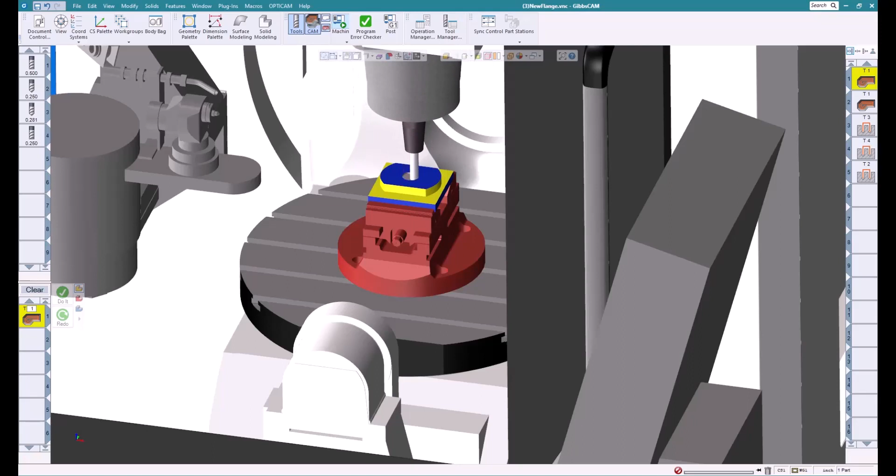Today we're going to be talking about utility markers. Utility markers are the ability to put explicit commands live in the toolpath as you program your part. If you wanted to maybe change a spindle speed or add a comment along the way in your toolpath, utility markers is the way to go. They're fast, they're easy to use, it's drag and drop kind of stuff, and easily editable.

Here is our finished toolpath. So we're going to go up here to our operation, and here we have utility markers. And when we click that on, you see that we get these points. These are the vector points or node points, whatever you want to call them. And different choices that we can do.

We can change the feed rate. We can change the spindle speed. We can put a comment. We can change the CRC. We can put in a program stop. All these things that you might need when you're programming your part. So for example, let's do a variable feed. Why would we do that?

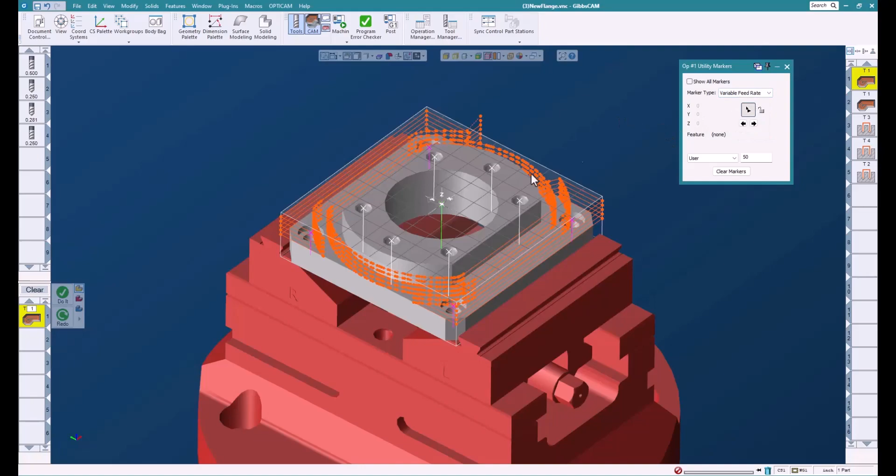Well, let's say that we want to come into this corner here at a higher rate of feed and then slow down. Okay, so maybe we want to come in at 50. Let's come in at a higher rate. Let's come in at 100, and we can drag it right there. Now let's say that when it ends, we want it to be 25. So it's going to start here. By the time it gets to here, it's going to change the feed rate. So it's going to slow down around this corner.

Now, we could also have it be both the same if we wanted to do that. But there's a good reason. Maybe the tool backs up. Maybe there's chip conditions. Maybe it's hard material. All those sorts of things could be possible. Maybe you want to change the spindle speed as well. So let's slow the spindle down. We're going to drop this in front of our other marker. Okay, so as it comes around here, the spindle speed slows down.

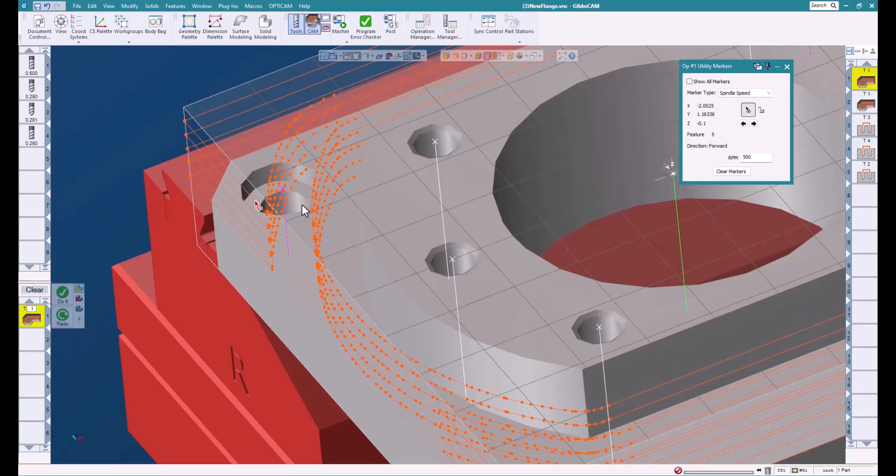We move into the corner, and we can slide this down here closer. And you'll also notice that these numbers update as well. So it kind of tells you where you're at along the toolpath, which is kind of cool. And then let's say maybe we want to put in a comment. Let's put it in as slow down the tool. And then we can drop that here if we wanted to do that as well. So just a couple of quick changes there.

And again, you could put these anywhere along any part of this toolpath. For this presentation, I just put them in the first run of the toolpath. This way you can see it easier. But you can put them everywhere. You can put them all down in here, put them over here. It's whatever you want to do. It's very nice. It's very efficient. And it's pretty fast to do, as you can see, just kind of like a drag and drop.

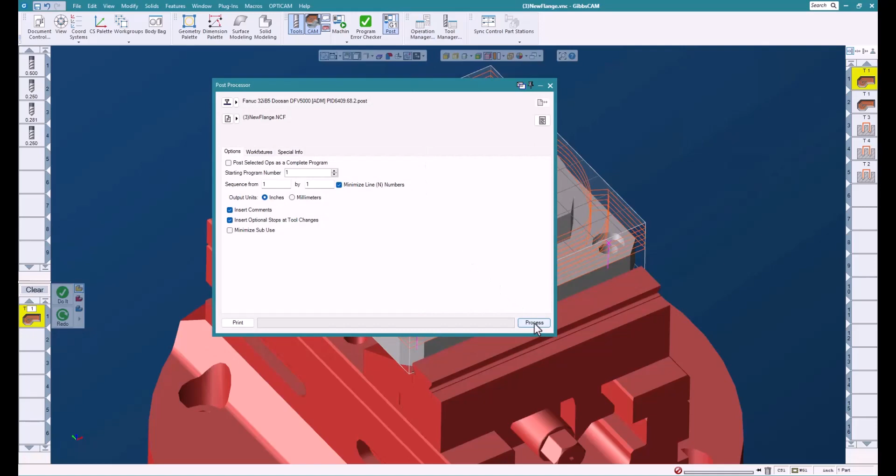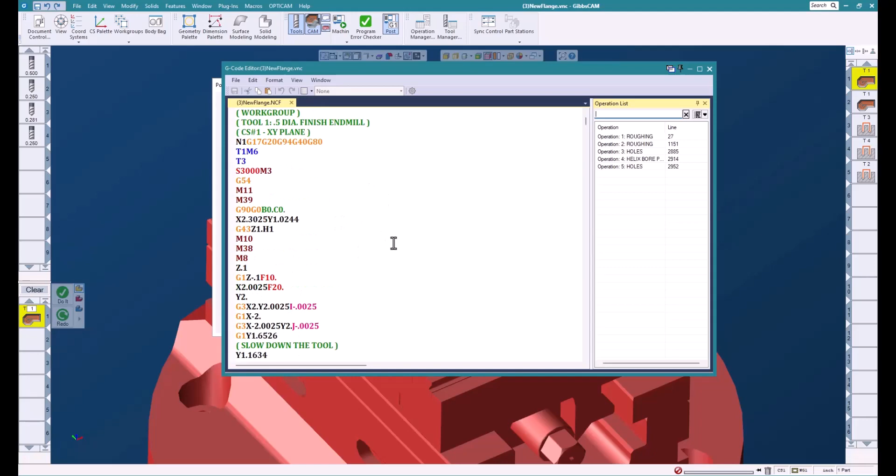Once we have the utility markers where we want them, we process it. So we're going to come down in here. We'll look at our code, our initial start, slow down the tool. We change the spindle speed. We up the feed rate, and then we slow it back down again. So these are very cool, very explicit commands that you can put into the G code without having to do a whole lot of work. Basically, it's just a drag and drop.

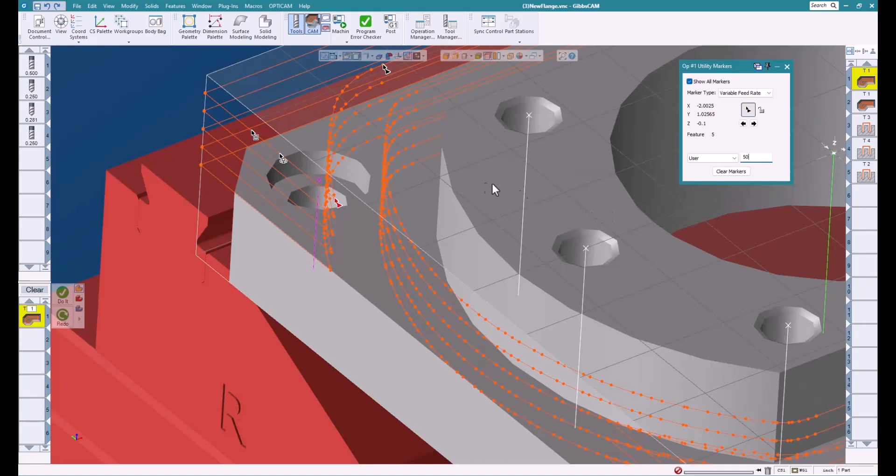You can also go back now. Let's go back to this, and let's show all the markers. So here's all the markers that we put on. And you can rearrange them. So for example, we could move this over here. We could pick on this here, and we could change this to say what we really wanted there was 50. So we can update and edit these on the fly. We can edit anything we want to edit. Just put it in there, and off we go. So again, it's very cool.

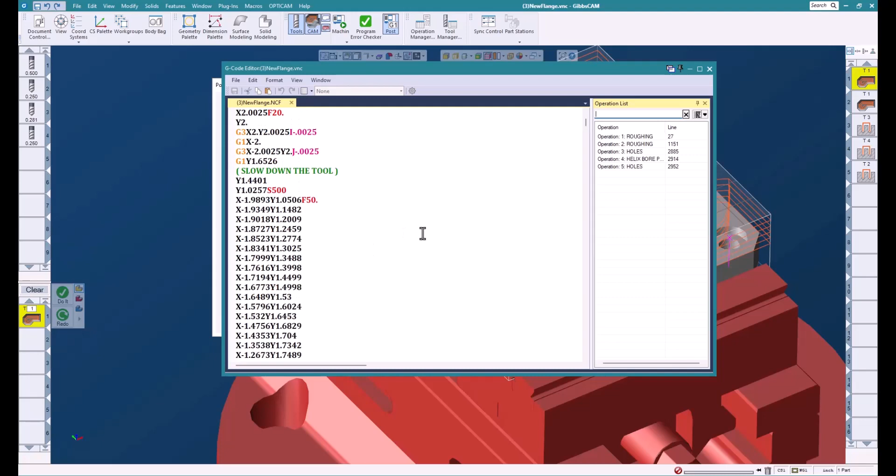It's very fast. So let's just process that again, just so you can see that we did make that change. Come down in here. These are our initial positions, 500. Notice we changed the feed rates. And here we are, we change them again. So again, very cool, very fast, very flexible. Gives us the ability to affect the toolpath without having to go in and edit a bunch of things in some editor. So with that said, that's utility markers. Use them. They're great. They work easy.